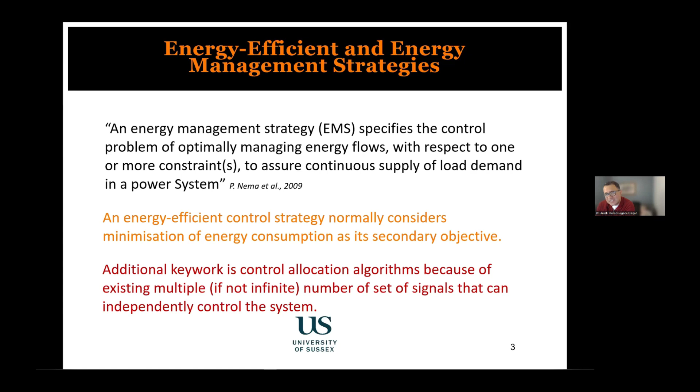Another keyword which is related here is the control allocation algorithm or problem, because most of the time these systems are called over-actuated systems, meaning that you can meet the energy requirement in different ways, and in most cases in infinite ways. Then the question is which one is the best with respect to the secondary objective. And these kinds of problems are normally called control allocation problems.

So, as I said, it's case study by case study. I'm introducing you a few case studies which are related to the concepts that I mentioned. One case study is an energy management strategy for standalone hybrid renewable energy systems. Standalone means that it's not connected to the grid. So these are small renewable energy sites, normally in remote areas, not connected to the grid.

And also, when we say hybrid renewable energy systems, it means that it has more than one type of renewable energy source, like wind turbines and solar panels together, or it could be different types. So not being connected to the network actually makes it more complex and challenging from the control perspective, because the grid can be assumed as an infinite capacity battery connected to your system, but without it, all your capacities, and particularly storage capacity, are limited.

Then the question is how you can stabilize such a DC microgrid in a way that you make sure that, for example, the voltage of this DC bus is always within a range, meaning that you're managing the consumption and the production of energy, and also how you can share the power demand proportionally, in a fair way, between different sources of energy.

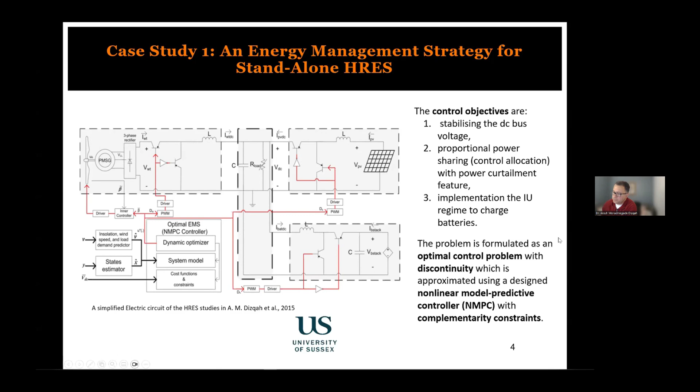So we formulated such a problem as an optimal control problem, and it has some challenges, which I will show you on the next slide. And then we developed a non-linear model predictive controller to solve it successfully. So the challenges of such a system are that, first of all, of course, it's a non-linear system, but more than being non-linear, at least two components of such a system are discontinuous.

It means that their operation changes completely with respect to some other events in the system. For example, the battery is one of those discontinuous systems. The behavior of the battery when it's charged is completely different from its behavior when it's discharged. The electric motor is another one, because its behavior when it's motoring is different from its behavior when it's generating.

So these are the main challenges of such a system, and this raises two main issues in solving such a problem numerically. One is that, first of all, formulating such a problem is a bit difficult.

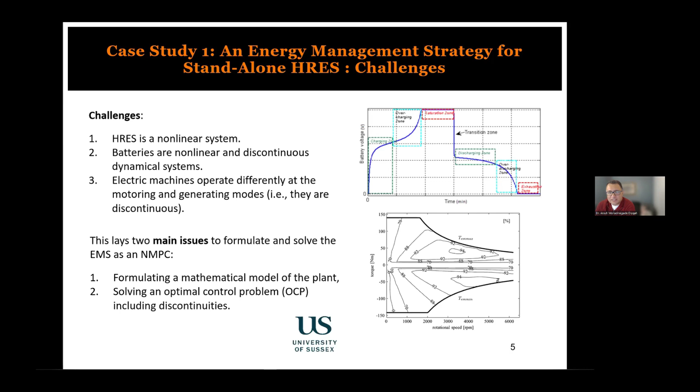And second is that formulating it in a way that you can solve it with available tool sets is another problem. So actually, I don't want to go into the details. I just want to tell you the main approaches that we use that may be useful for the audience for their problem as well. First of all, we focus on a mathematical technique called complementarity constraints.

And complementarity constraints are very good to model the discontinuities. The good thing about complementarity constraints is that we have numerical tools to solve them. So in other words, we convert the problem of a discontinuous system to a problem with complementarity constraints that thankfully we can solve numerically as well. So this is one way that we did it.

Complementarity constraints are shown in this equation. This is a symbol of it, but the meaning is that at any time, either of the sides of the symbol would be at its boundaries. Meaning that at any point, for example, gamma 1 actually equals I battery stack, or gamma 1 is either 1 or 0. So every time that you get a sample, either of these conditions would happen.

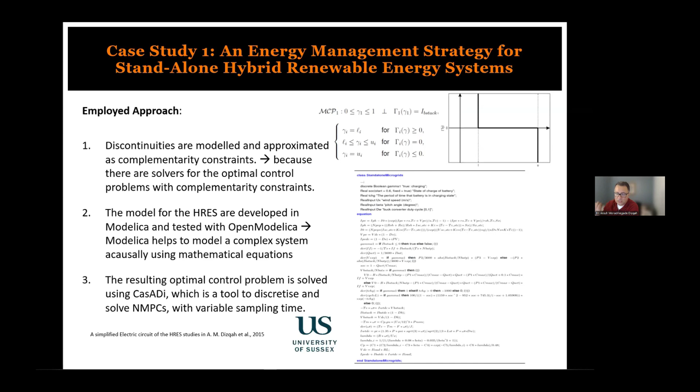But the point is that because the system is discontinuous, that makes the solver a bit more complex, in a way that you should make the sampling time variable over time. So you can't have a fixed sampling time. You should use a variable sampling time in order to find out the location of those discontinuities.

the charging of the battery is with a slightly increasing current, but at constant voltage. And it helps to charge the battery to a larger SOC without damaging the battery. And that was the main purpose of this algorithm.

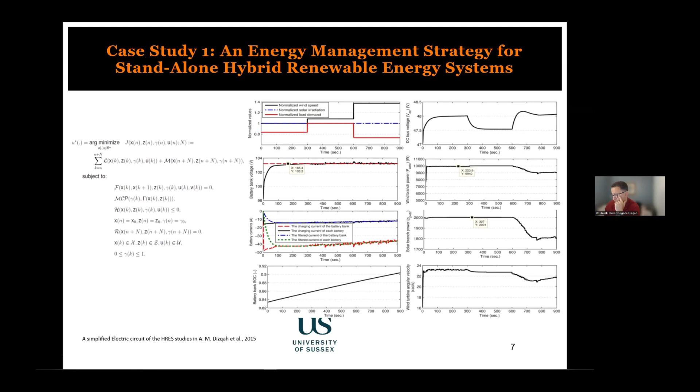Then we focused on another problem. The problem was the energy management strategy of electrified vehicles. In this case, it was fully electric vehicles, but with multiple drivetrains. So it means that this car has 4 electric motors, 1 per wheel.

Then the question was how we can use these multiple electric motors in a way that we can minimize the energy consumption. Or in other words, whether having multiple electric motors can reduce the energy consumption of an electric vehicle or not. And we showed that yes, it can.

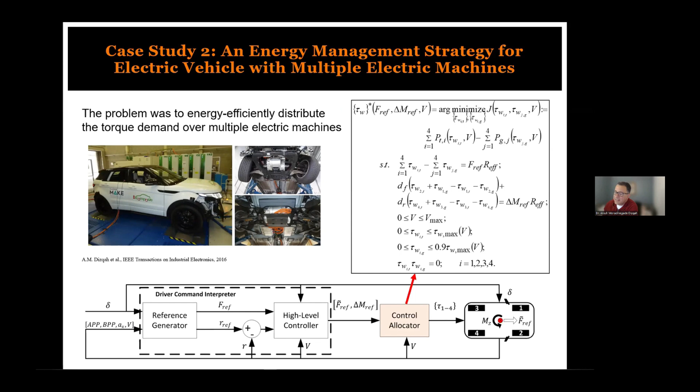We formulated the problem. I'm not focusing on the detail, but again, this problem has the same issue: electric motors can be either working as a generator or motoring, and they should switch between them and cannot work in both operations at the same time. And then the question is when this should be switched. The point is that we showed that such a problem can be solved for each side of the electric vehicle. So we simplified the problem.

Then we also mathematically proved that the optimum solution of each side cannot be a mix of traction and generation. So the optimal solution of each side is either generation or traction, and this solved the problem. This made the problem very straightforward and simplified, in a way that we converted the optimization problem to an algebraic problem.

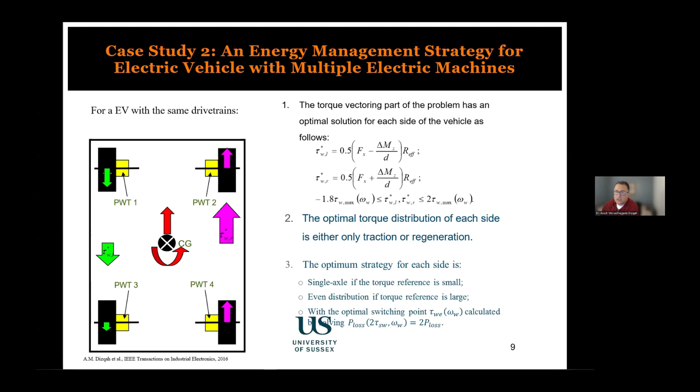We showed that the optimal solution of each side is either single axle, meaning using just one of the motors, or even distribution, meaning using them equally. And then the question would be when we should switch between them, so we formulated an algebraic equation whose solution tells us the switching torque. So by increasing the torque, there is a specific point, depending on the speed, where you should switch between even and

single axle solution. So then we used this system for deriving the power loss curves of the vehicle at each speed. We fit the algebraic equation to those power loss curves, and then we solved it for each of the speeds of the car, and we found a switching torque for each speed. As a result, the final solution was very simple, a lookup table that tells us what the switching torque of each side of the vehicle should be, depending on the speed of

the vehicle. And putting it in the ECU of the vehicle, we showed that we can have up to 4.6% energy reduction, depending on the driving test cycles of the vehicles.

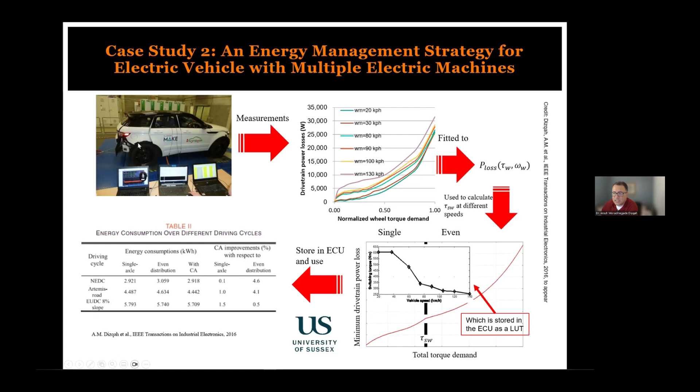And if yes, how long of this look-ahead information is effective? And finally, what technique can we use to exploit that look-ahead information for controlling the engine? We answered all those questions. First of all, we did extensive statistical research, finding that about 2 seconds of look-ahead information is enough, particularly in the form of torque demand. So if we know the torque demand our vehicle would experience within the next 2 seconds, it's effective, and we don't need more look-ahead information.

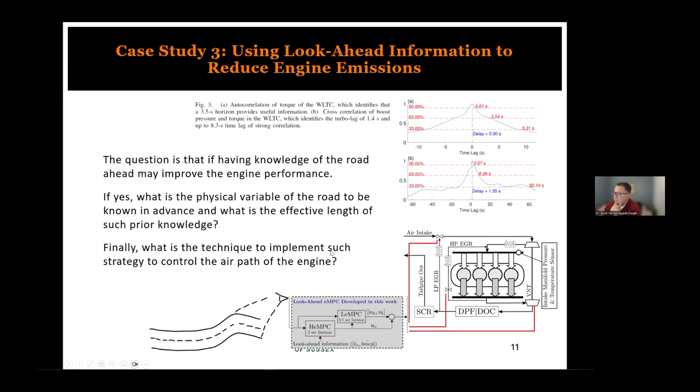The result was controlling the turbocharger and the 2 EGRs of a vehicle that was in the production line at JLR. And we showed, based on our hardware-in-the-loop simulation, that exploiting look-ahead information can reduce NOx by 9% and soot by 14%, compared to the optimal controller without look-ahead information. So this 9% and 14% is just the effect of look-ahead, of considering future data.

It's good to note that NOx and soot are contradictory. There is a trade-off between them, and improving NOx normally degrades the soot emission. But by developing such an algorithm, we could find the optimal solution that the car manufacturer and engine developers couldn't find before, because generally the technique used in the car manufacturing industry is to do a lot of extensive practical tests.

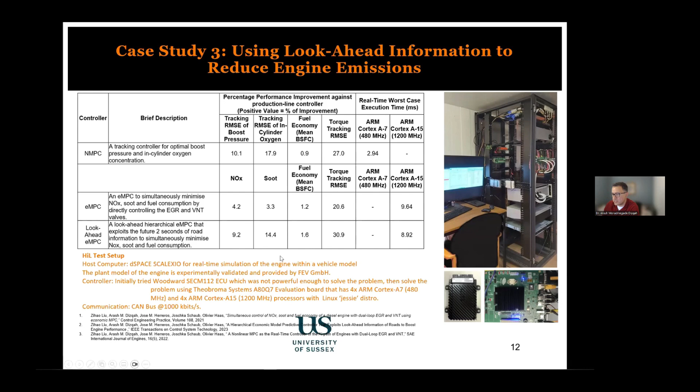Not blind, but with lots of theory behind, in order to find the solutions as lookup tables and put those lookup tables in the ECU of the car. But we showed that the extensive work they had done was not able to find the optimal solution that our system could find. As a result, we showed a significant reduction in NOx. And this result has been patented in the UK.

Then we came up with another problem. As you can see, it's all about energy efficiency or pollution efficiency, but in different applications. Then we came across another research question related to energy efficiency, but for connected and autonomous vehicles. The question is, with all cars connected and autonomous, can we improve the throughput of intersections? Can we formulate such a problem, solve it, and show that having all vehicles collaborative and autonomous would improve the throughput?

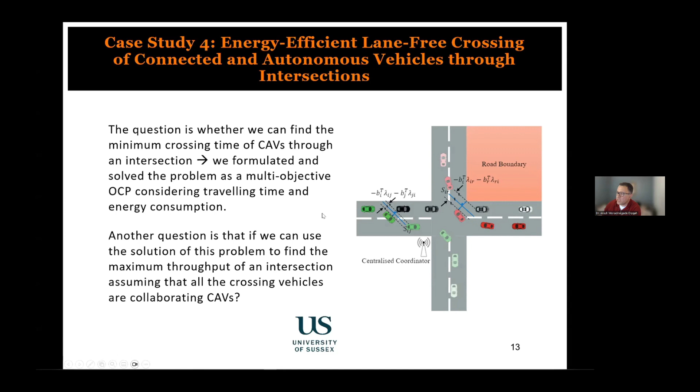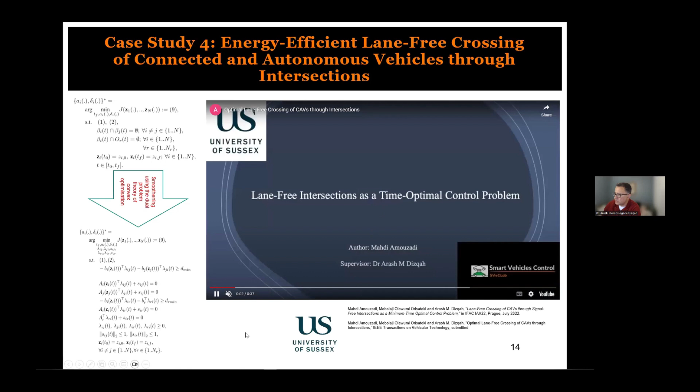So we formulated such a problem again as an optimal control problem, and with some difficulties we solved it, and you can see the results here, for example, how the vehicles would cross such an intersection if they are fully autonomous. This is one case study. Next is a bit more complex case study.

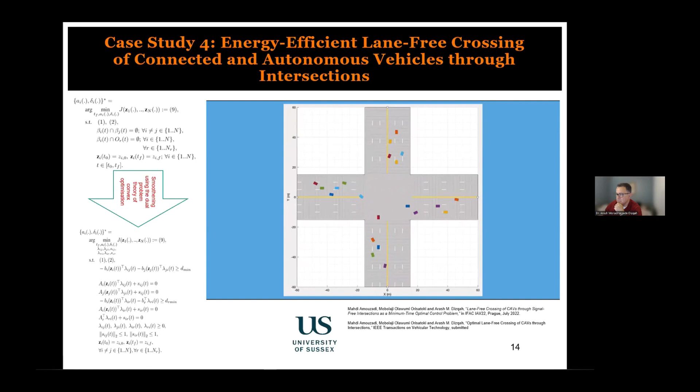And yeah, so as you can see, the vehicles actually cross lane-free and signal-free, and we showed that using such a technique can improve the throughput of the intersection by about, I can't remember the percentage, I can calculate now. Yeah, it's about 80%.

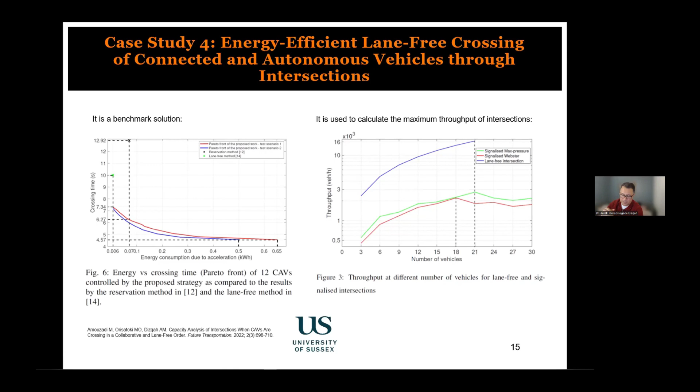However, this is a benchmark: we showed that this value of the throughput is actually limited by the theories of the geometry. Our technique could reach that theoretical limit of the geometry, and we showed that we can use the results of such an algorithm as a benchmark for any algorithm that wants to control the signals of the intersection or control the vehicles.

And finally, the last question that we came across was in robotics. The question is interesting. It's within a class of problems called informative path planning. The question is whether we can efficiently, in an energy-efficient way, control or plan the path of a robot with a single uncertain sensor to make a map of a completely unknown area. Then the question is whether, without knowing anything about that map, we can find a close to globally optimal solution of such a problem.

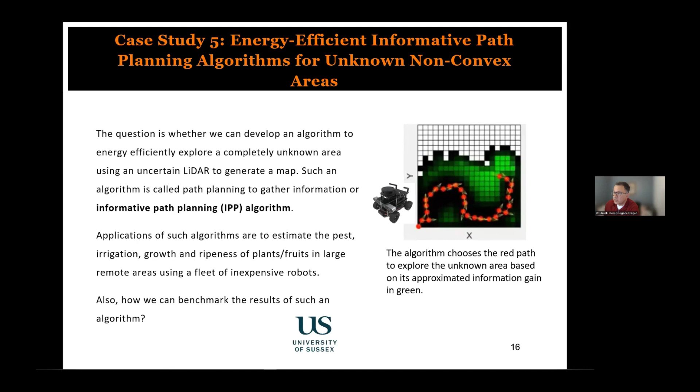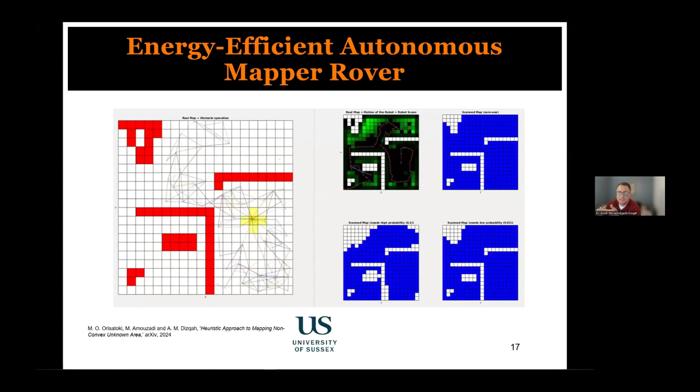Then the next question was, okay, can we benchmark it? How can we compare the outcome of such an algorithm and say whether it works properly or not? We defined a posterior problem, meaning we assume that we know the map and we want to remap it. The solution of such a posterior problem, a remapping of a known map, we take as a benchmark, and we showed that our algorithm follows the benchmark here, which is a linear behavior of the number of identified cells over the traveling time. It shows how linearly the number of identified cells increases.

And our algorithm actually follows that trend of the posterior benchmark solution over a very good range of the time, up to about 60% of the time, before reaching a kind of saturation, where it just moves a lot but only for one cell or another.

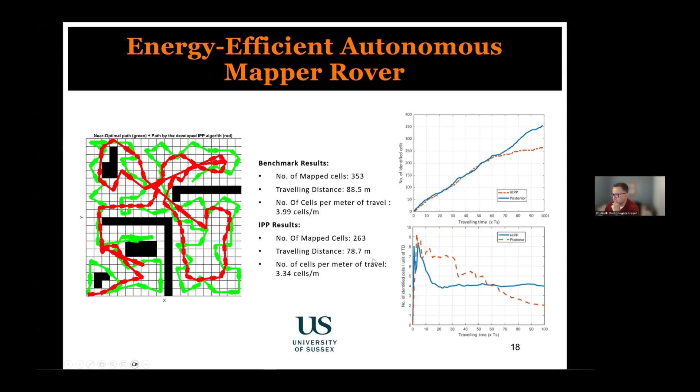I just want to finish my talk with one point: when we wanted to test these algorithms, we reached the point that we needed a tool, and we developed one. We call it ROBIL, Robot in the Loop Simulator, a tool to test collaborative or distributed algorithms. When you have multiple robots or multiple cars and your algorithm should run on multiple of them, it's very expensive to test your algorithm in reality. The question is whether we can use scaled-down robots, for example for cars, to do the middle test of such algorithms in a very cost-effective way.

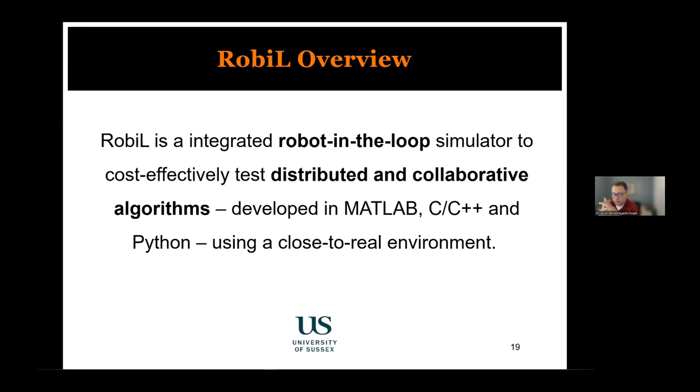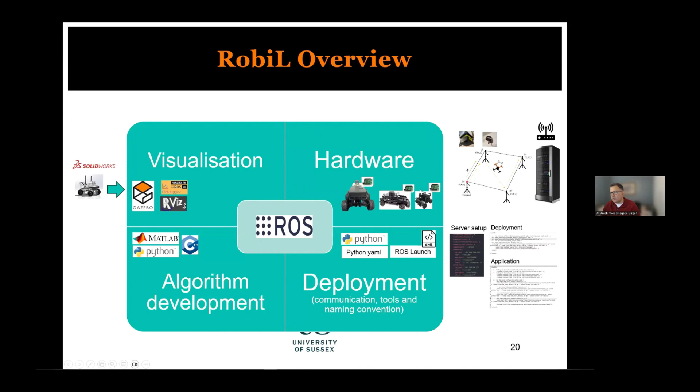We developed ROBIL based on a technology called ROS, Robot Operating System, on top of it, in a way that you develop your robot in SolidWorks integrated into it, and then you use either this SolidWorks model as a digital twin of your real robot, or the real robot, or a combination of them to test your algorithms.

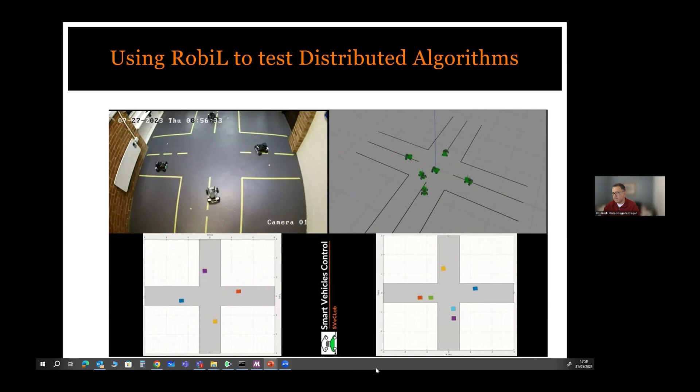This video shows the results of that algorithm for crossing the intersection that I explained before. The bottom ones are results generated by MATLAB, and the top ones are generated by ROBIL, the top left using the real robot, the top right using its digital twin. Using this tool, we are testing the performance of our different algorithms in a situation close to real.